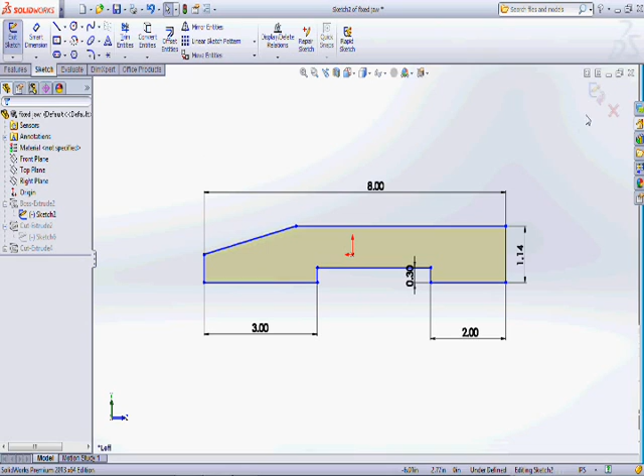First, this drawing was part of the parallel clamp, and this part was the fixed jaw. I'm going to exit the sketch, so you're going to see the whole fixed jaw.

You're going to see the first icon under the DimXpert Manager, the auto dimension. Click it. You're going to see the settings: reference features, scope, feature filters.

Just click the features reference, and as you see under the reference feature, there are 3 parts: the primary, secondary, and tertiary.

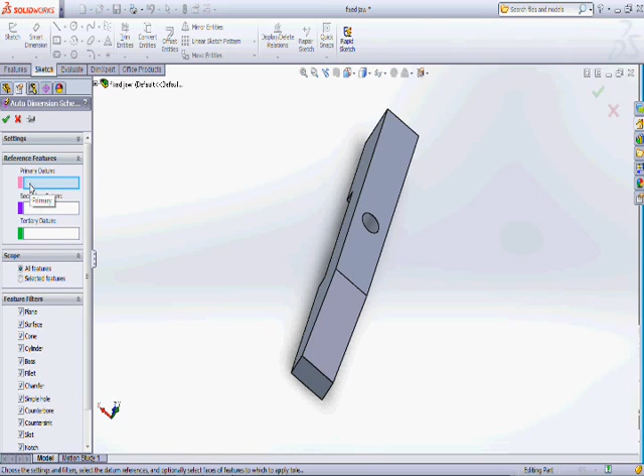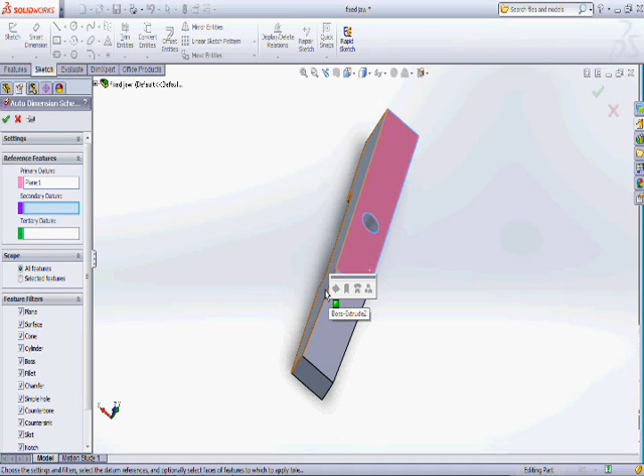Click the primary and click the top view of the drawing, the top view of the fixed jaw, and click the secondary datum, and click the side view of the workpiece, and then click check.

As you see, the tolerances are shown in the drawing on the screen.

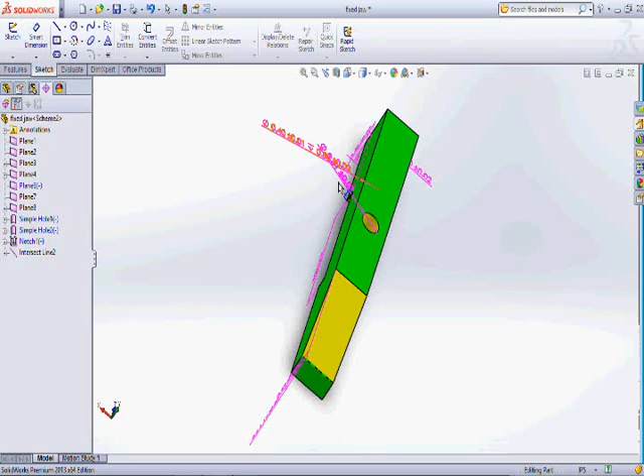As we go on the top view, we're going to see the tolerance and the dimension of the hole, the tolerance of the width, and as we go to the side view, we're going to see the other specific part that has the tolerance.

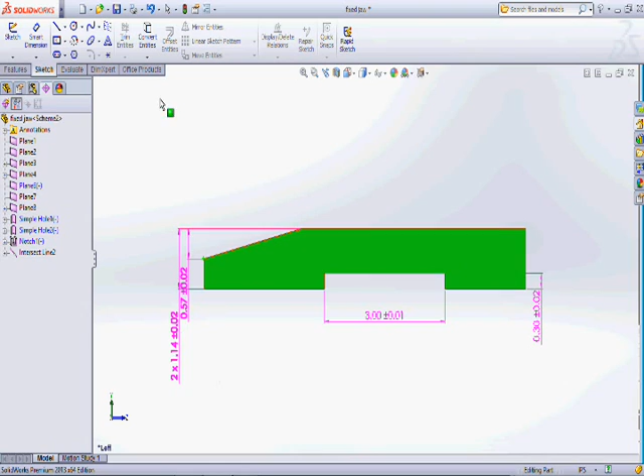In this part, we're going to transfer the sketch to the drawing paper. We click new drawing, click OK. Browse. We're going to use A4 landscape. Click OK.

Click the movable view. I'm going to change the scale to 1:2, so the drawing can fit in the drawing paper. As you can see at the left side view of your monitor, the view layout.

Under the view layout, you can see the model view. Under the model view, you can see the reference configuration orientation, and the orientation lets you click any view you like to view the drawing.

I'm going to choose the right side view, and the second option, the import option. Import option is the part when the tolerance can be shown. Click the tolerance, import annotation, click the design annotation, DimXpert annotation, and

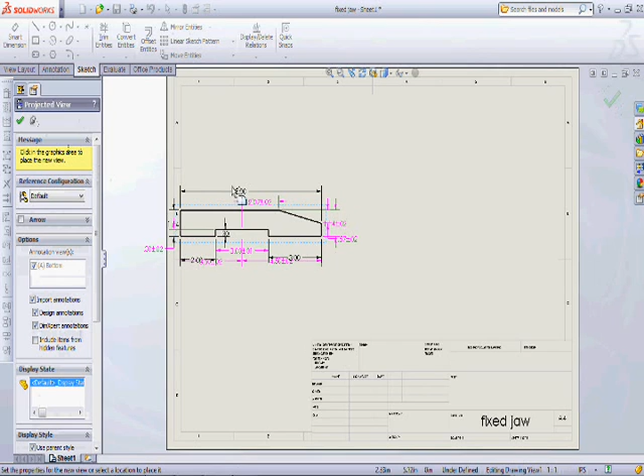go back and choose this one and click the drawing. As we can see, the tolerance and the dimension are being shown in the drawing.

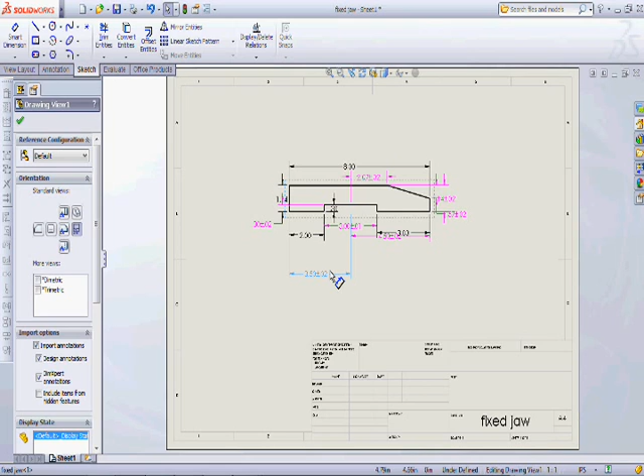The tolerance are in the pink color, and the black are the dimension of the fixed jaw.

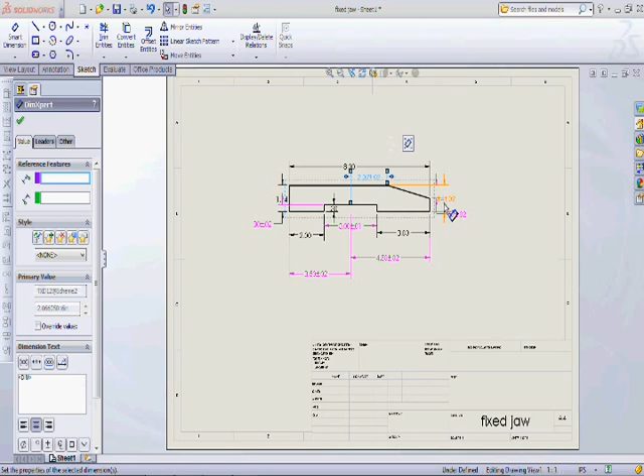I'm going to click the other view. I'm going to show you the other view of the fixed jaw, the top view. Click the projected view.

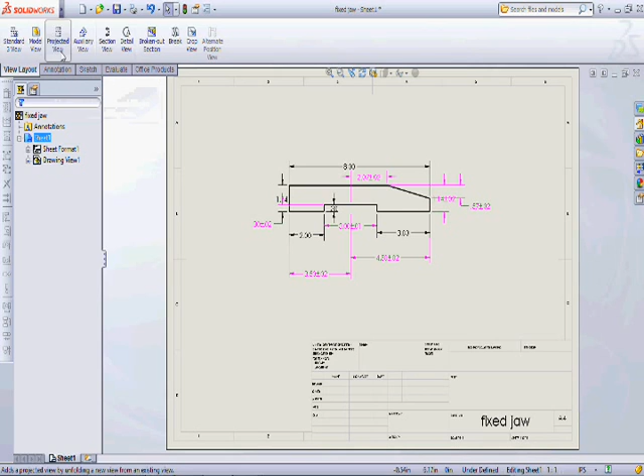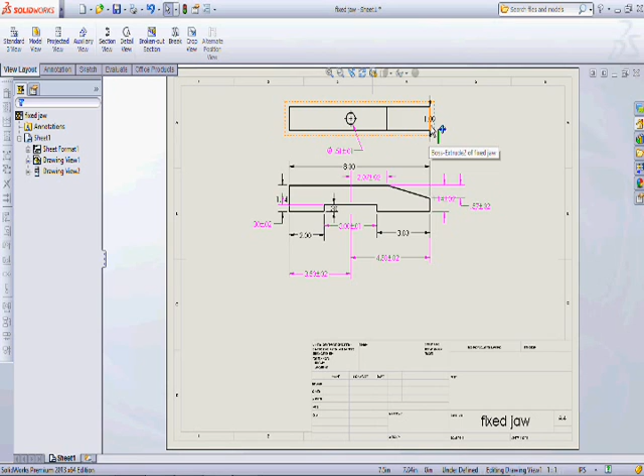As we can see, the top view is being shown, and the tolerance and the dimension of the hole is being displayed, and the width of the fixed jaw is 1 inch. And there we go.